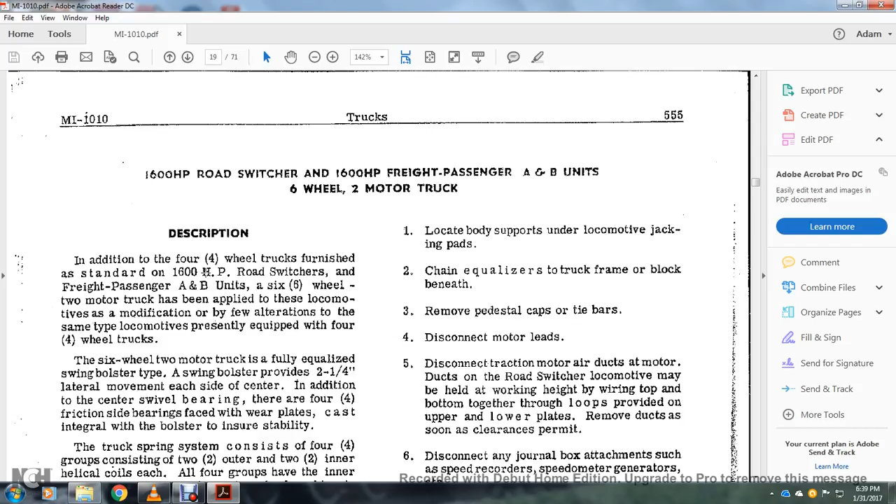Six-wheel, two-motor truck. The description: in addition to the four-wheel trucks furnished with the standard 1600 horsepower road switcher and the freight passenger A and B units, the six-wheel, two-motor truck has been applied with these locomotives. Modification and alteration for the same truck type locomotives presently equipped with the four-wheel trucks.

The six-wheel, two-motor truck is fully equalized with the swing bolster. The swing bolster is provided with 2 1/4 inch lateral movement to each side of the center. In addition to the center swivel bearing, there are four friction side bearings faced with wear plates cast integral within the bolster for stability.

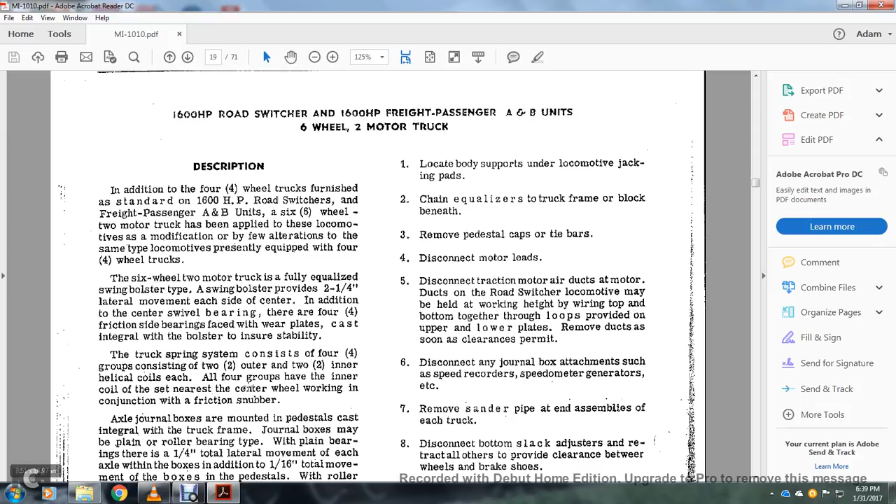The truck spring system consists of four groups, each consisting of two outer and two inner helical coils. All four groups have the inner coil near the center of the wheel working in conjunction with the friction snubber.

All axle journal boxes are mounted in pedestals cast integral with the truck frame. Journal boxes may be of the roller bearing type or the plain bearing type. There is a 1/4 inch total lateral movement on each axle with the plain bearing box, with 1/16 inch total movement of the boxes in the pedestal. With the roller bearing, the Timken or the SKF, the total lateral per axle is 1/4 inch, obtained with the movement of the boxes in the pedestal.

The lateral thrust in the plain bearing boxes is taken directly through the axle and stopped in each of the journal boxes. But with the Timken or SKF equipment, the thrust is taken directly from the bearings. No end thrust bearing is required.

The brakes are single shoe, one shoe per wheel. The power cylinder brackets and hanger brackets are also cast iron, integral with the truck frame. A manually operated slack adjuster is provided in order to compensate for brake shoe wear. Provisions are made for application of the hand brake chain.

Remove the axle, wheel and box assembly with the motors. To remove the axle, wheel and box assembly from the truck under the locomotive, a drop table is necessary. Assume that this equipment is a single table type large enough to handle the complete truck. The use of the table requires the locomotive to be supported at the jacking pads. When the table is lowered with the removal of the single axle, wheel and box assembly, the truck remains suspended on the safety hooks, and the procedure will be as follows.

One, locate the body support under the locomotive jack pads. Chain the equalizer to truck frame or block beneath. Remove the pedestal cap and tie bars. Disconnect the motor leads. Disconnect the traction motor air duct at the motor duct. Remove the ducts as soon as clearance is permitted.

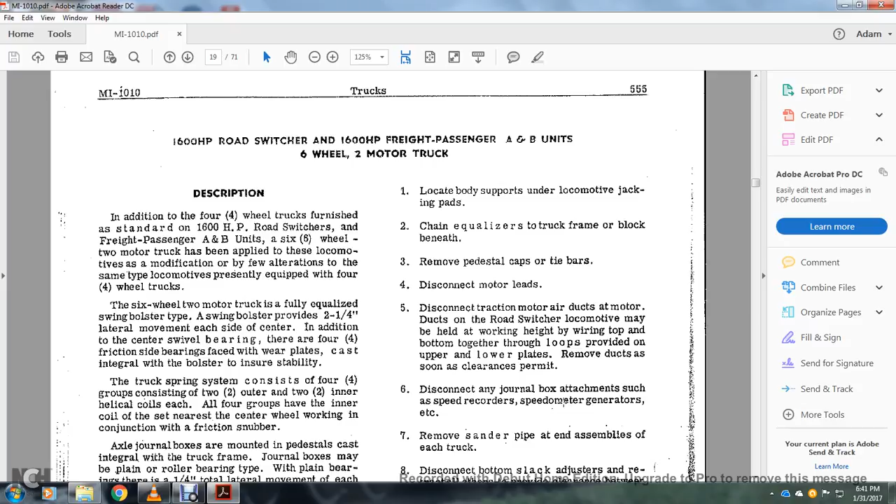Disconnect the journal box attachments such as the speed recorder, the speedometer generators, etc. Remove the sander pipe at each end of the assembly of each truck. Disconnect the bottom slack adjuster. Retract the brake shoes to provide clearance between the wheels and brake shoes, jack the motor nose, and remove the suspension assembly. See item 4 for the disassembly of the trucks.

Lower the motor until the motor safety lugs rest on the truck frame suspension brackets. Allow the drop table to settle slowly, keeping the motor nose on the jack pad so that the motor safety lugs will pass the truck frame lugs. Caution: exercise care with the motor air duct assembly so that it is not damaged. Continue to lower the assembly until it is free of the truck.

Reinstall the axle, wheel and box assembly. This operation should be performed in reverse sequence of the removal, with the axle assembly resting on the drop table. Correctly position the motor with the nose tilted so that the safety lugs will pass through the frame lugs. Raise the assembly until the safety lugs can again rest on the top of the frame lugs.

2. Bolt the air duct boot on the motor. Installation will be easier on the road switcher locomotive, if the boot is compressed and retained with the wires through the loops provided. Continue to raise the assembly to the normal position and in the pedestal and apply the caps. Reapply the motor nose suspension spring assembly.

See item 7 for reassembly of the truck. Reconnect the bottom slack adjusters. Reconnect the motor leads. Reconnect the journal box attachments. Check the brake adjustment. Readjust the sander pipe position. Check the lubrication packing assembly of the plain bearing boxes.

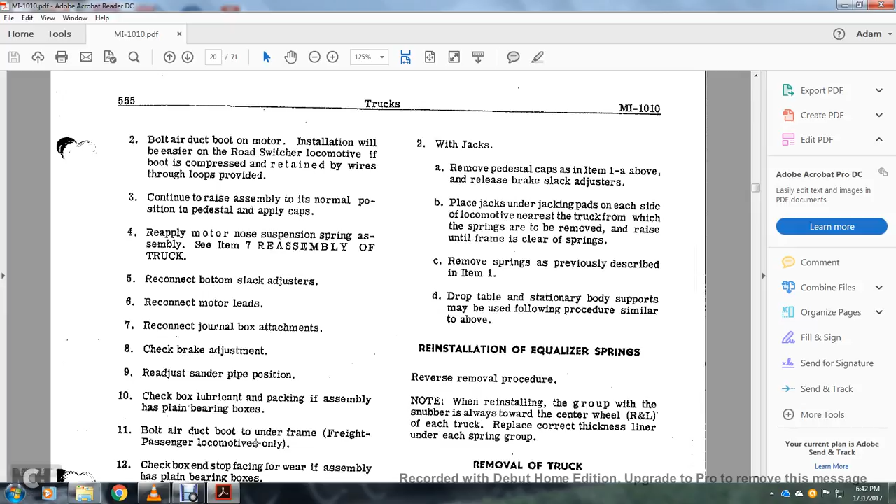Bolt the air duct to the underframe, with the freight passenger locomotives only. Check the box end stop facing for wear if assembly of the plain bearing boxes.

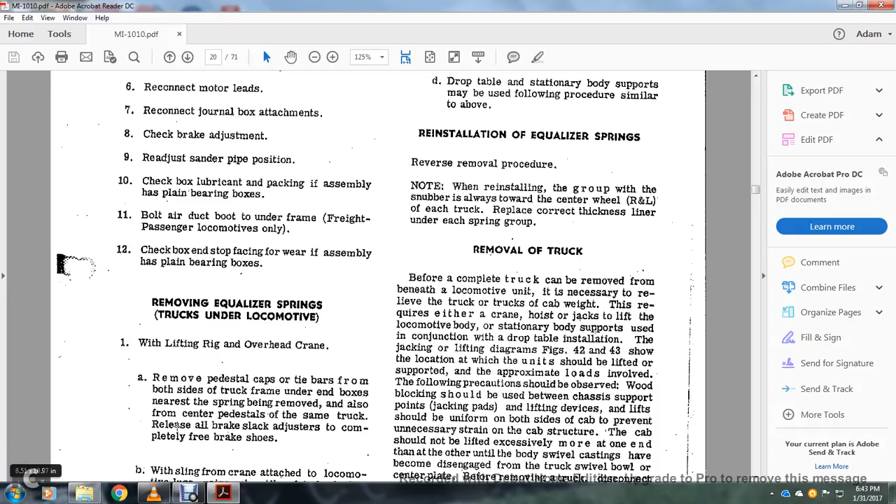Removing the equalizer spring from the trucks under the locomotive. With the lifting rig and overhead crane. Remove the pedestal tie bars from both sides of the truck frame under the end of the boxes near the spring being removed. Also from the center of the pedestal, same truck. Release all the brake slack adjusters to completely free the brake shoes.

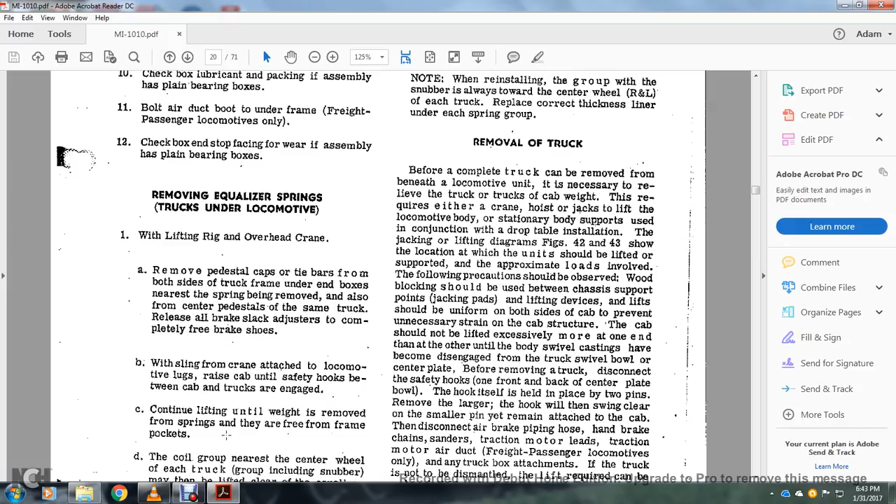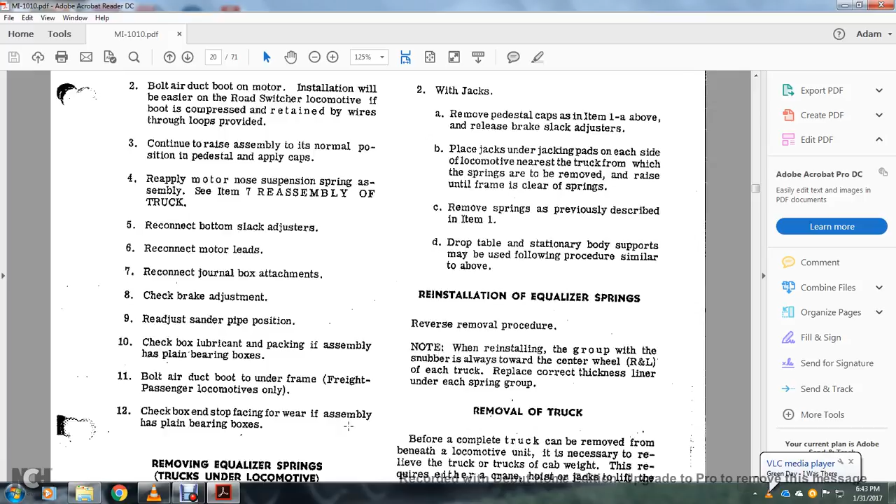The coil group nearest to the end of the wheels may then be removed. 2. With jacks, remove the pedestal caps as with item 1 above, to release the brake slack adjustment. Place the jacks on the jacking pads on each side of the locomotive near the truck with which the springs are to be removed. Raise until the frame is clear of the springs. Remove the springs previously described in item 1. Drop the table stationary body support. The following procedure, similar to above, may be used.

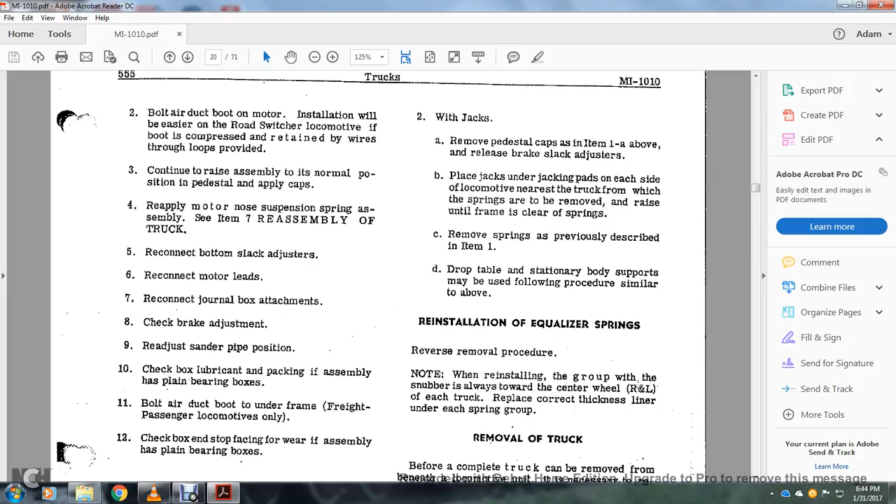Reinstallation of equalizer springs. Reverse the removal procedure. Note when reinstalling, the group with the snubber is always toward the center wheel, on the right and the left of each truck. Replace the correct thickness of liner under each of the springs removed. Alright, removal of the truck.

Before the complete truck can be removed from beneath the locomotive, it is necessary to relieve the truck or the trucks of the cab weight. This requires either a crane or a hoist or jacks to lift the locomotive body. The stationary body support is used in conjunction with the drop table installation. The jacking lifting diagrams, figures 42 and 43, show the locations at which the unit should be lifted and supported, with the approximate loads involved. The following precautions should be observed.

Wood blocking should be placed between the chassis, supported at the points of the jacking pad. The lifting device should lift uniformly on both sides of the cab to prevent unnecessary strain on the cab structure. The cab should not be lifted excessively more at one end than the other until the body swivel castings have become disengaged from the truck swivel bowl or center plate.

By a drop table, which requires the use of the stationary body supports lifting and the rig with an overhead crane. By jacking, lifting the cab a sufficient amount, disengaging the swivel castings and providing clearance above the truck so that they may be moved laterally beneath the locomotive, using the turntable, the transfer table, and using the jacks to remove the front truck on the freight passenger locomotive.

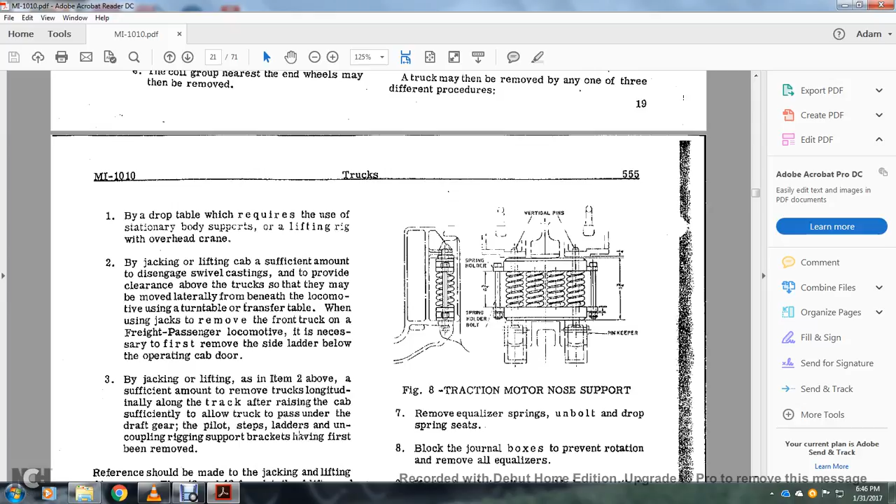It is necessary to first remove the side ladder below the operating cab door. By jacking and lifting item 2 above, sufficient to move the trucks longitudinally along the track after raising the cab sufficiently to allow the trucks to pass under the draft gear and pilot steps, ladders, and uncoupling rigging support brackets, having first been removed. References should be made to the jacking and lifting diagrams in figures 42 and 43 for the details and liftings and loads involved. Disassembly of the truck.

Remove all the pedestal tie bars. Remove the bottom slack adjusters. Retract all the other brakes so that the brake shoes are clear of the wheels. Remove the traction air duct from the top of the motors. Remove all the motor's nose suspension springs as follows.

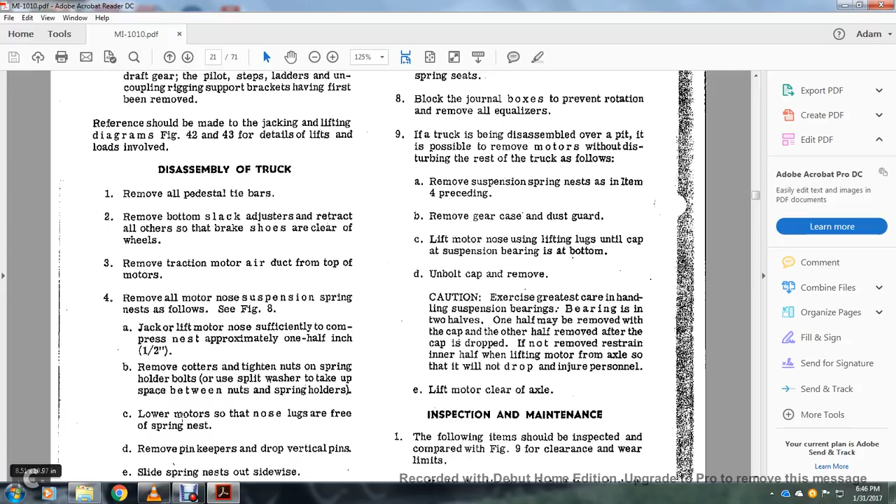Jack or lift the motor nose sufficiently to compress the spring approximately 1/2 inch. Remove the cotter. Tighten nuts on the spring holder bolts. Use the split washer to hold the spaces between the nuts and spring holders. Lower the motor so that the nose lugs are free of the spring nest. Remove the pin keeper to drop the vertical pins. Slide the spring nest out sideways. Again, raise the motor nose to provide clearance preparatory to

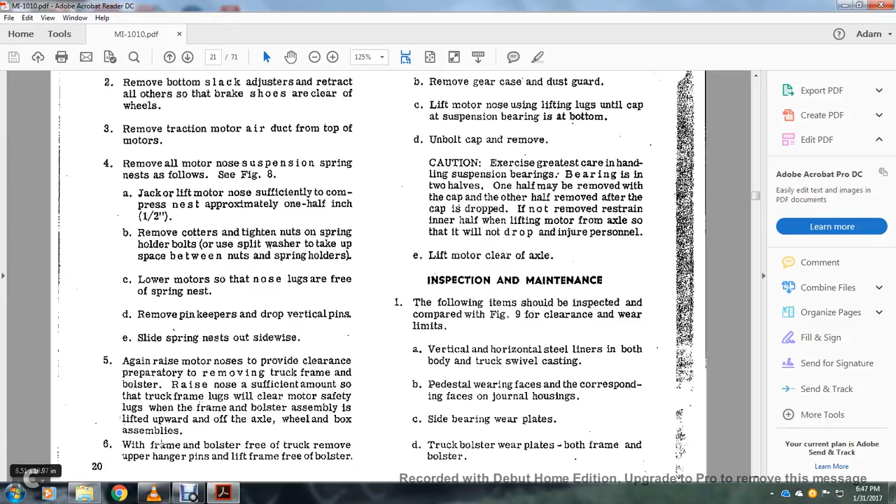removing the truck frame and the bolster. Raise the nose a sufficient amount so that the truck frame lugs will clear the motor. Safety lugs will clear and the frame and the bolster assembly are lifted upward off the axle wheel box assembly. With the frame and the bolster free of the truck, remove the upper hanger pins, lifting free of the bolster. Remove the equalizer springs, unbolt and drop the spring seat, block the journal box to prevent the rotation, and remove the equalizer.

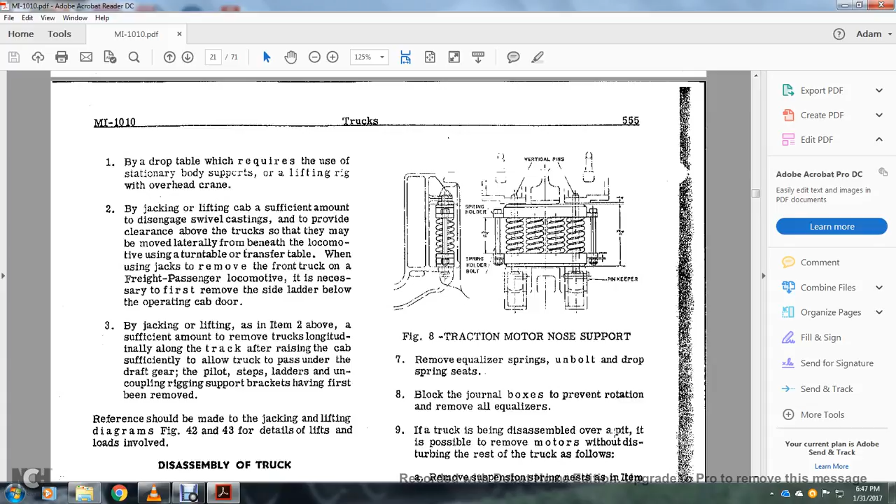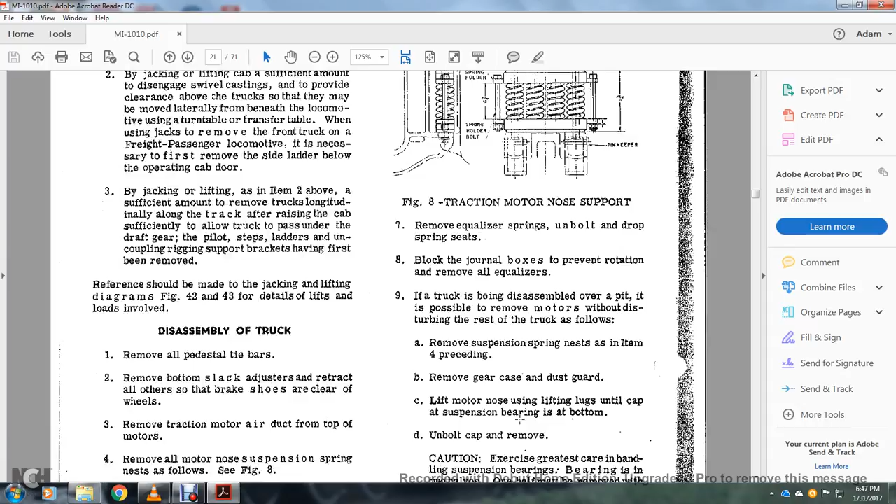If the trucks are being disassembled over a pit, it's possible to remove the motors without disturbing the rest of the trucks as follows. A. Remove the suspension spring nest. B. Remove the gear case and the dust guard seat, lifting the motor nose, the lifting lugs, until the cap of the suspension bearing is at the bottom. Unbolt the cap. Exercise great care in handling the suspension bearing, which is in 2 halves.

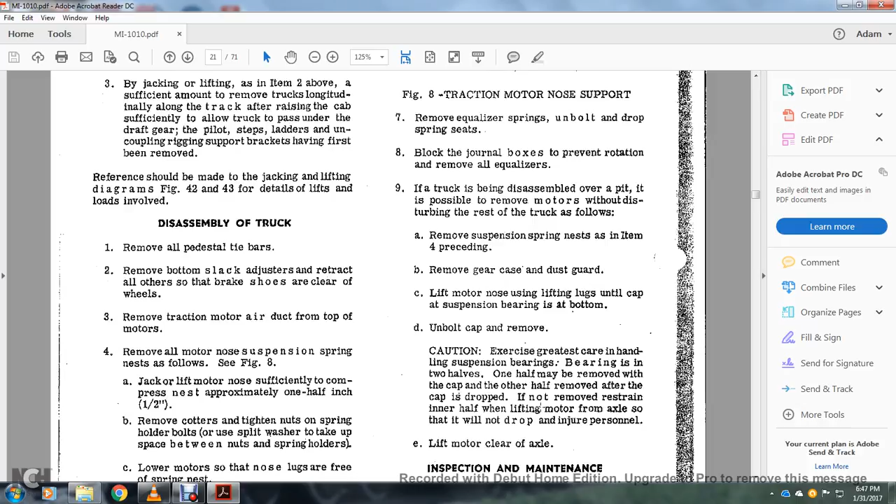One of the halves may be removed with the cap, and the other half is removed after the cap is dropped. If it's not removed, restrain the inner half when lifting the motor from the axle so that it will not drop and injure personnel. Lifting motor clear of the axle. Figure 8 shows the traction motor nose support with the spring holder bolt, the spring holder, and the pin keeper, the vertical pins.

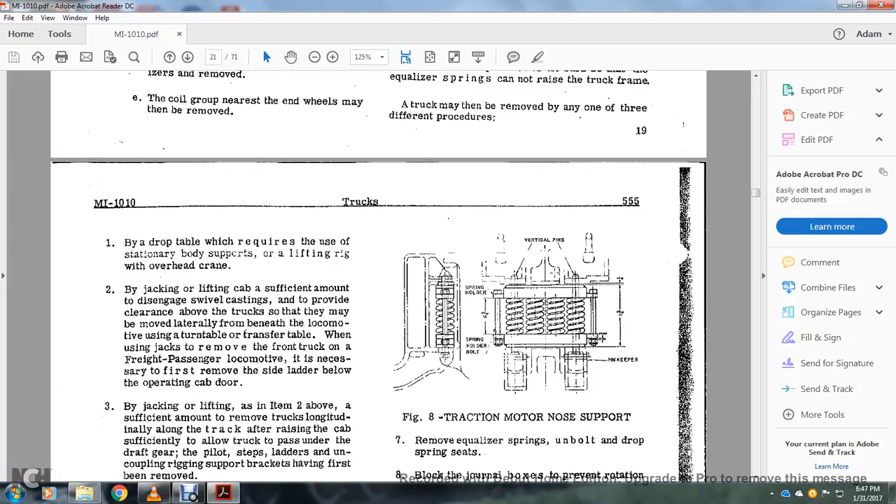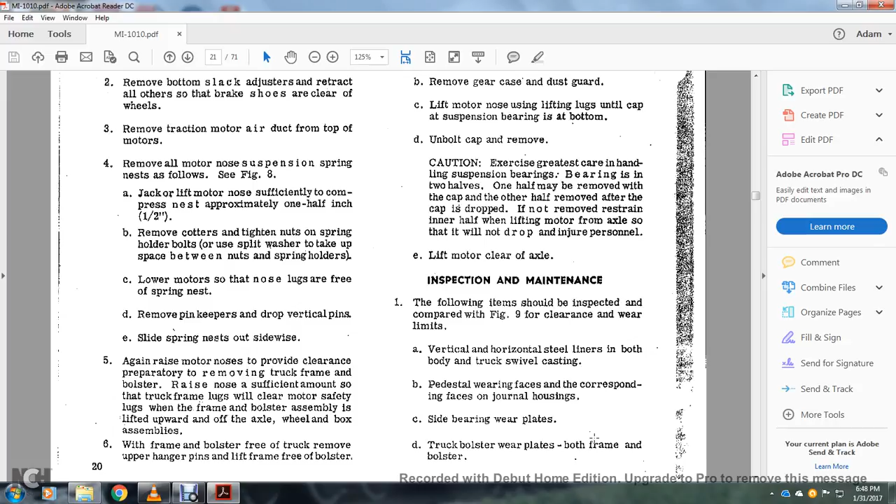All right, inspection and maintenance. The following items should be inspected and compared with figure 9 with the clearance and wear limits: vertical and horizontal steel liners of both body and truck swivel casting, pedestal wearing face and the corresponding face on, the journal housing side wearing plates, the truck bolster wear plates of the bolster frame and the bolster. Swing link pins and bushings, spring hangers, restraint brackets, wear bolts, wear plates, and such as foundation brake hangers, equalizing pin and bushing seat of the foundation brakes.

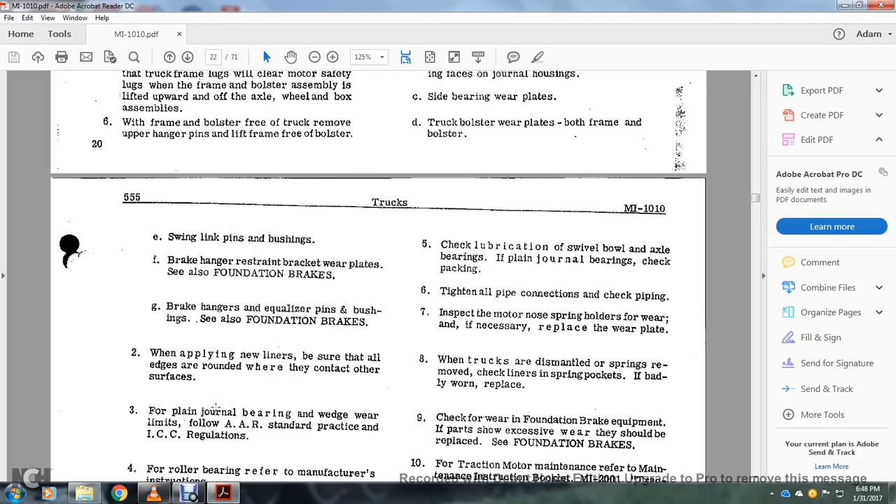When applying new liners, be assured that all the edges around that they contact the surface of the plain journal bearing wedge wear within limits that follow the AAR and standard practice of the ICC regulation. For the roller bearing, refer to the manufacturer's instruction. Check lubrication of swivel bowl, axle bearing, plain journal bearing.

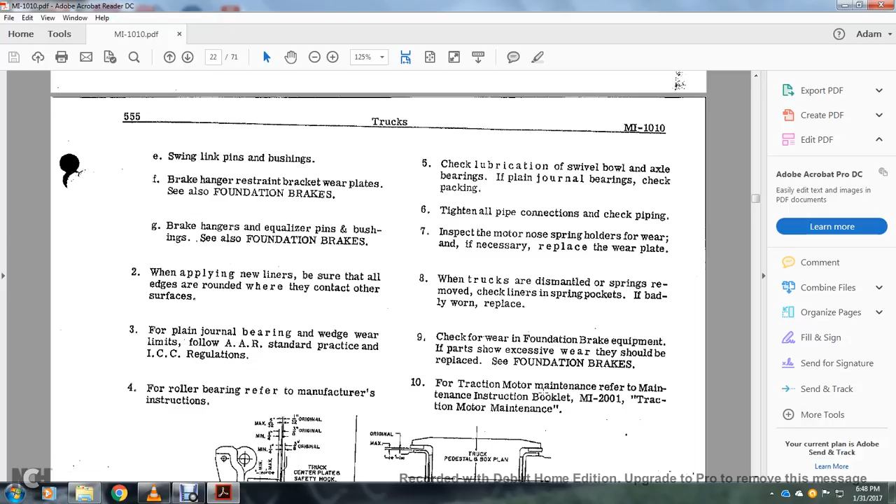Check and tighten all the pipe connections. Check piping, inspect motor nose and spring holders for wear. If necessary, replace the wear plates of the trucks and dismantle the spring, remove and check liners of the spring pockets, and if badly worn, replace. Check for the wear of the foundation brake equipment and parts, and excessive wear should be replaced, and see the foundation for the traction motor maintenance. Refer to the maintenance instruction booklet, MI 2001, traction motor instruction. All right, this shows your truck pedestal box plan.

The truck center plate with the safety hooks, your truck bolster, and your truck pedestal box, along with your swing hanger pin and bushing, truck side bearing, and truck brake hanger restraining pad.

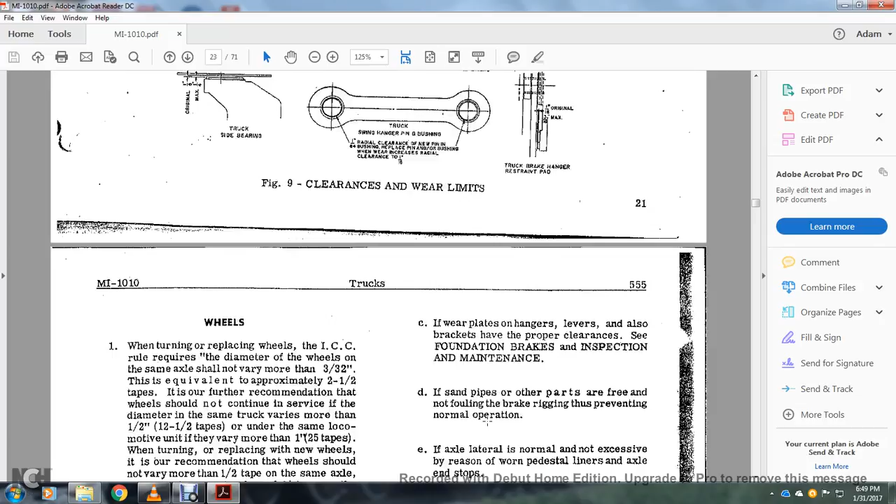All right, wheels. When turning or replacing wheels, the Interstate Commerce Commission requires that the diameter of the wheels on the same axle shall not vary more than 3/32 of an inch, equivalent to approximately 2 and 1/2 tapes. Another recommendation is that wheels on the same truck should not vary more than 1/2 inch, or 12 and 1/2 tapes. Under the same locomotive unit, wheels that vary more than 1 inch, or 25 tapes, should be replaced with new wheels.

The recommendation for the wheels is that they should not vary more than 1/2 the tape on the same axle, 2 tapes on the same truck, or 14 tapes on the same locomotive. Wheels should be checked periodically for wear according to the Interstate Commerce Commission regulations.

If excessive wear is found, check to determine if the brake shoes are free and not binding with the flange of the wheel tread, if the brake hanger levers are hanging the shoe without causing misalignment of the shoe, and if the wear of the plates of the hanger lever is bracketed with the proper clearance. Inspect the foundation brake maintenance, and whether the sandpipes or other parts are free and non-fouling of the brake equipment rigging, preventing normal operation. Check whether the axle lateral is normal and not excessive because of the pedestal liners, axle end stops, or excessive variation of wheel diameter, see item 1 above.

All right, when applying new shoes, they must hang true in the heads, the nuts of the brake head pins should be adjusted so that vibrational shock will not cause the shoe to drag the wheel, but still permit the face of the shoe to conform to the wheel as the wear progresses.

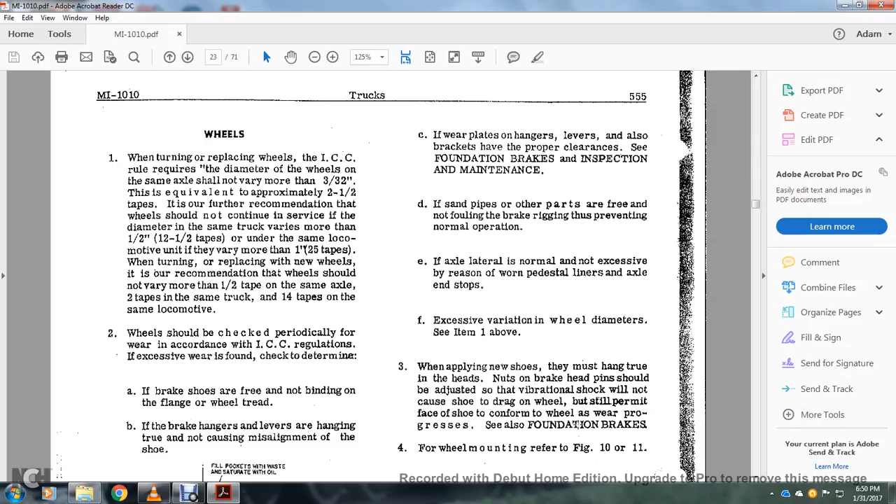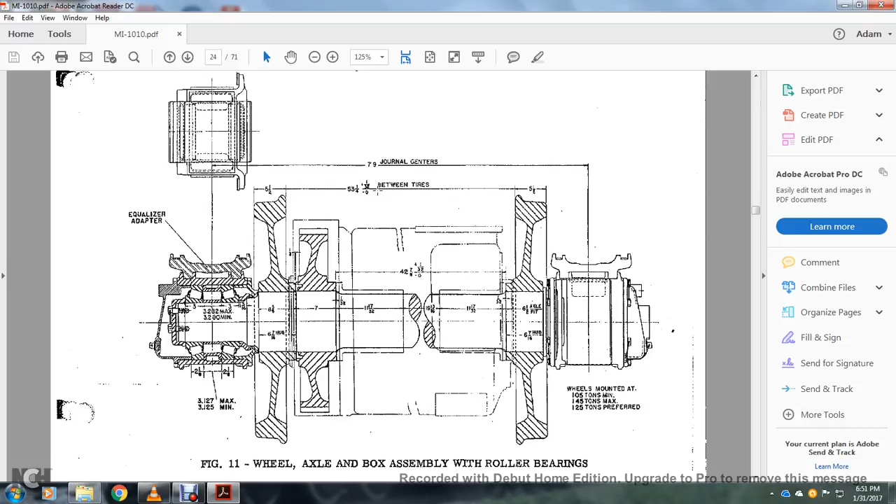All right, axle gear. The mounting of the axle gear is based on interference fit, regardless of the tonnage pressure recommended with the interference fits. The bore of the axle gear is 9.991 of an inch plus .001 of an inch or minus .000 of an inch diameter. Axle 10 inches, plus or minus .001 of an inch. For complete axle gear instruction, see maintenance instruction booklet MI 2001, truck maintenance, traction motor maintenance.

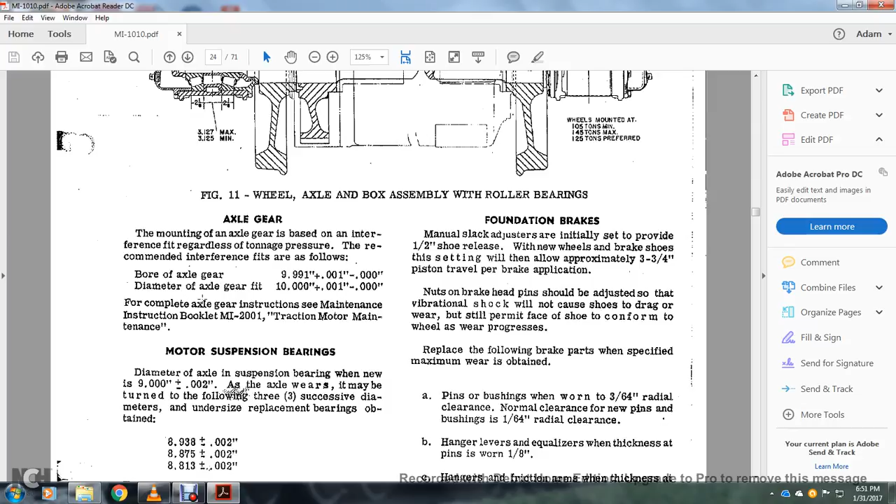The motor suspension bearings: the diameter of the axle at the suspension bearings when new is 9 inches, plus or minus .002 inch. As the axle wears, it may be turned to the following three successive diameters. Undersize replacement bearings are obtained with 8.938 plus or minus .002 inch, 8.875, .002 of an inch, and 8.813, .002 inch. For the complete axle bearing instruction, see maintenance instruction booklet MI 2001 traction motor maintenance. See the parts bulletin DRP 1317 undersized bearings.

All right, your foundation brakes. The manual slack adjuster is initially set to provide 1/2 inch shoe release with new wheels. The brake shoe setting will allow approximately 3 3/4 of an inch piston travel per brake application. Nuts of the brake head pin should be adjusted so that vibrational shocks will not cause the shoe to drag with the wear, but shall permit the face of the shoe to conform to the wheel as the wear progresses. Replace the foundation brake parts following wear. Specify the maximum wear is obtained.

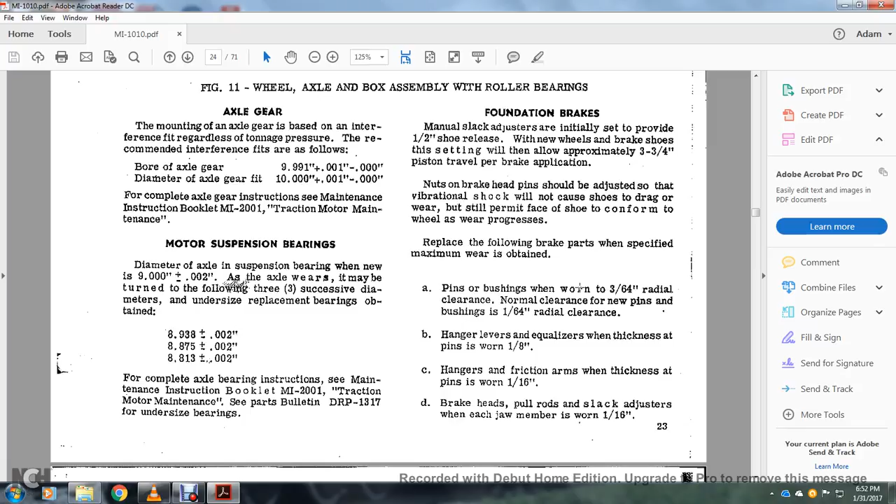Pins and bushings will be worn with a 3/64 inch radial clearance with normal clearance. The new pins and bushings have 1/64 radial clearance, Hanger levers and equalizers when thickness of the pins 1/8 of an inch, Hangers and friction arms of the thickness at the pins, 1/16 of an inch. Brake heads, pull rods, and slack adjusters, when each of the jaw members is worn 1/16 of an inch. All right, hangers, equalizer, fulcrum brackets, and pins supporting are worn 1/16th of an inch. Clevises when pin holes.

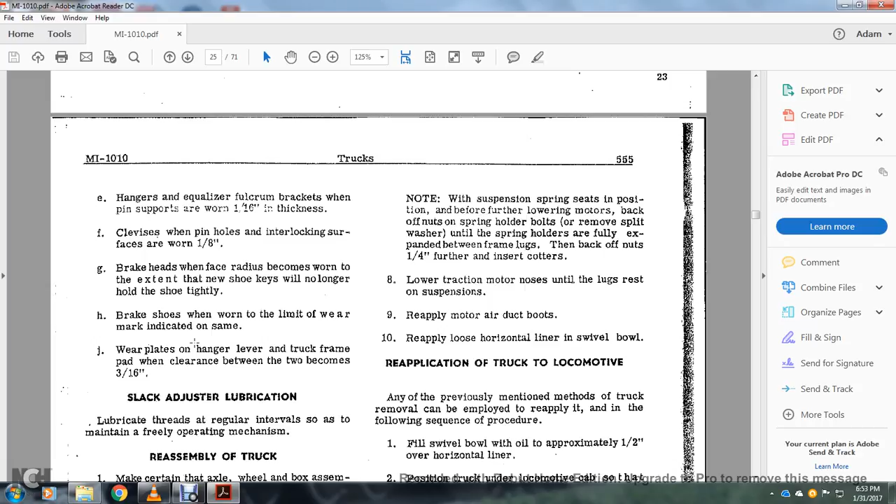Interlocking surface is worn 1/8 of an inch. Brake head: when facing the radius becomes worn to the extent that the new shoe keys will no longer hold the shoe tightly. Brake shoes will be worn limited to the wear mark of identification indicated on the same, wear plates on the hanger lever and truck frames, and where clearance between them becomes 3/16 of an inch.

Slack adjuster lubrication. Lubricate the threads at regular intervals so that all mechanisms maintain free operation. Reassembly of the truck. Make certain that the axle, wheel, and box assemblies and axles have splined holes in the ends for the use of the drive. The journal box mounted with the equipment such as the speed recorder, speedometer, transition generators, etc., are positioned the same way that they were when the truck was removed from the locomotive.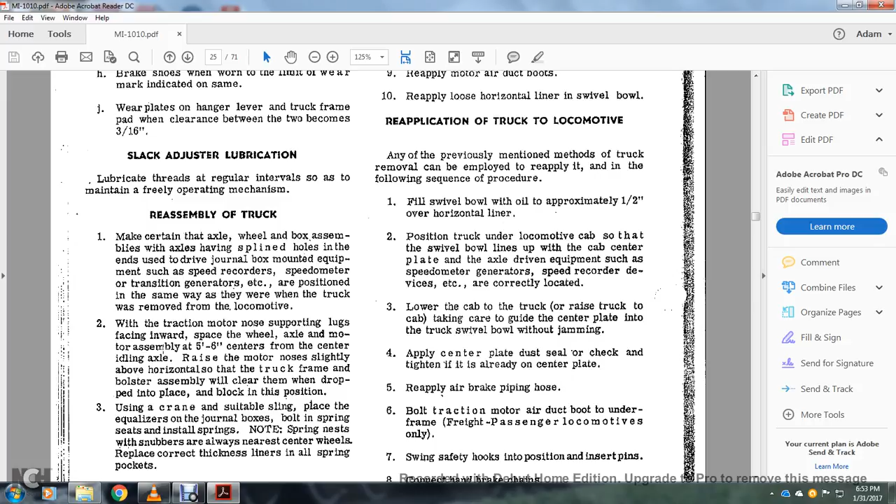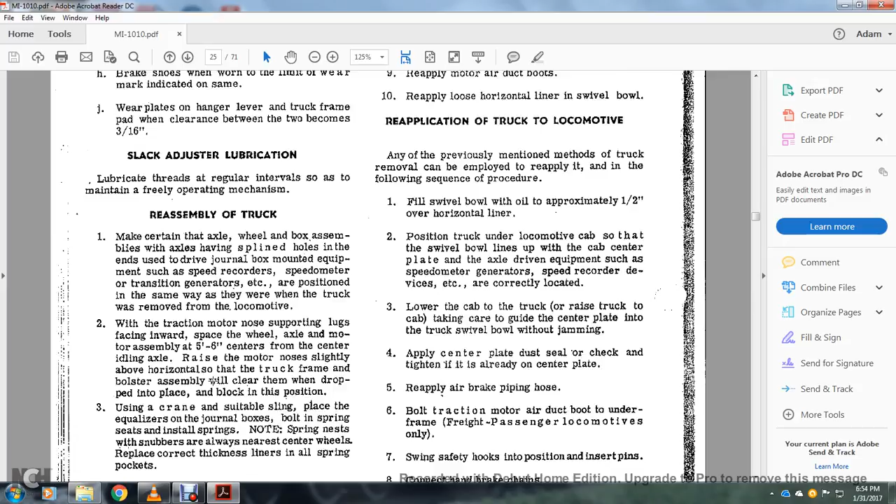2. When the traction motor nose supporting lugs are facing inward, space the wheels, axle, and motor assembly 5 foot 6 inches center to center, raising the motor nose slightly above the horizontal so that the truck frame and the bolster assembly will clear when dropped into place, block in this position. 3. Using a crane and suitable sling, place the equalizer on the journal box, bolt in the spring seat.

Then install the springs. Note the spring nests with snubbers are always nearest to the center wheels. Replace the correct thickness liners in all spring pockets with all the foundation brakes of the equipment except for the bottom slack adjusters assembled to the truck frame with the bolster installed, lower the frame into position between the equalizer and finally onto the coil springs.

Attach the bottom slack adjusters, attach the pedestal tie bars. Lower traction motor nose suspension spring nests may be slid in between the lugs and motor frame. Push the vertical pins in the spring nest at the bottom and apply the pin keeper. If the truck is not assembled over a pit. It will be necessary to raise the truck in order to insert the suspension pins.

Note: with the suspension spring seats in position and before the further lowering of the motors, back off the nuts and spring holder bolts or remove the split washer until the spring holders are fully expanded between the frame lugs. Then back off the nuts 1/4 of an inch further and insert the cotter. Lower the traction motor nose until the lugs rest in the suspension. Reapply the motor air duct boots. Reapply the loose horizontal liner in the swivel bowl.

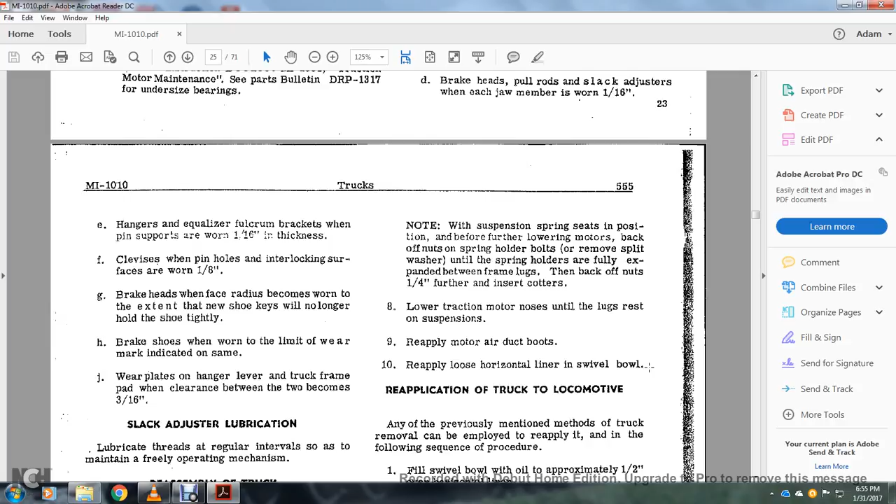Reapplication of the truck to the locomotive. Any of the previously mentioned methods of truck removal can be employed to reapply in the following sequence. Fill the swivel bowl with oil to approximately 1/2 inch over the horizontal liner. Position the truck under the locomotive cab so that the swivel bowl lines up with the cab center plate and the axle driven equipment such as the speedometer,

generator, speed recorder devices, etc., are correctly located. Lower the cab onto the truck or raise the truck to the cab, taking care to guide the center plate into the truck swivel bowl without jamming. Apply the center plate dust seal or check and tighten it if it is already on the center plate. Reapply the air brake piping hose, bolt traction motor air duct boot under the frame, freight passenger locomotive.

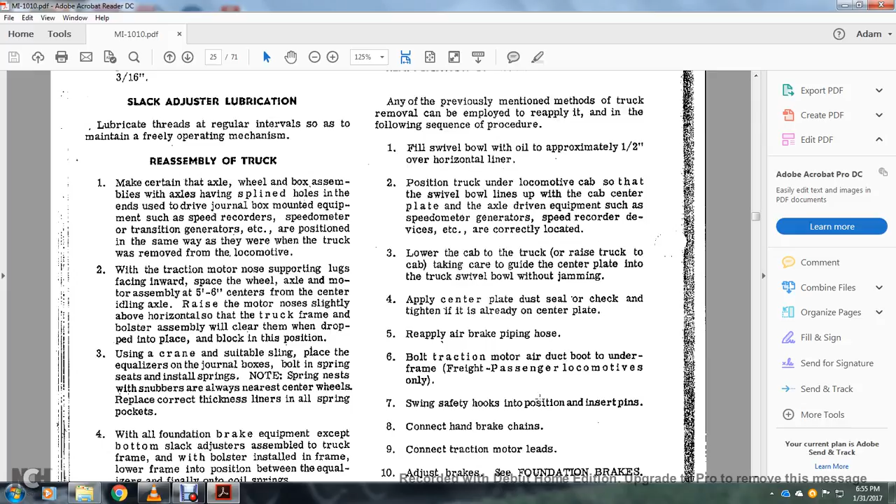Swing safety hooks into position. Insert pin, connect the handbrake chains, connect the traction motor leads, adjust the brakes, see the foundation brakes, connect any of the journal box attachments such as the speedometer, generator, speed recorder drives, etc.

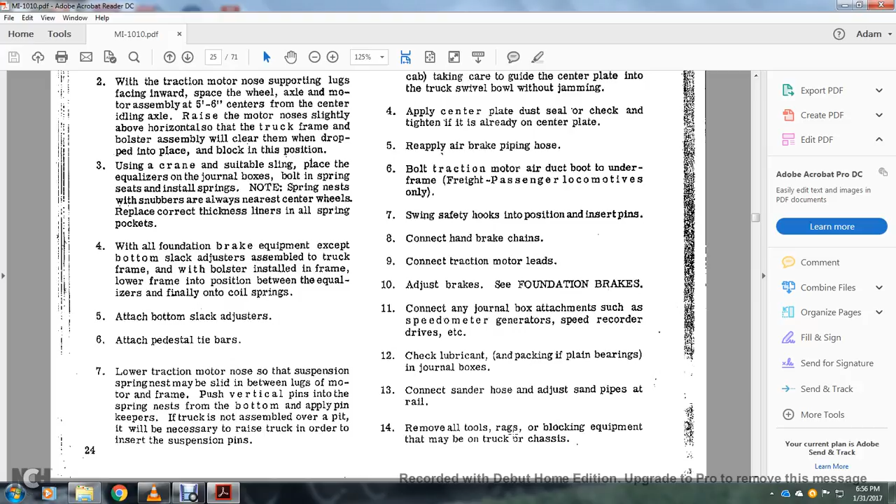Check lubricant, and packing if plain bearings, in the journal boxes. Connect all the sander hoses and adjust the sand pipes at the rail. Remove all the tools and rags and blocking equipment that may be on the truck or the chassis.

Adjustment of the center plate height. When it becomes necessary to raise the center plate height to compensate for worn wheels, it may be done as follows. A 1/2 inch thick liner may be applied in each of the helical spring pockets at the bottom and the top. The 1/2 inch liner may be applied with the truck swivel bowl under the loose horizontal wear plate, which, when this is done, the side bearings and safety hooks must be adjusted accordingly.

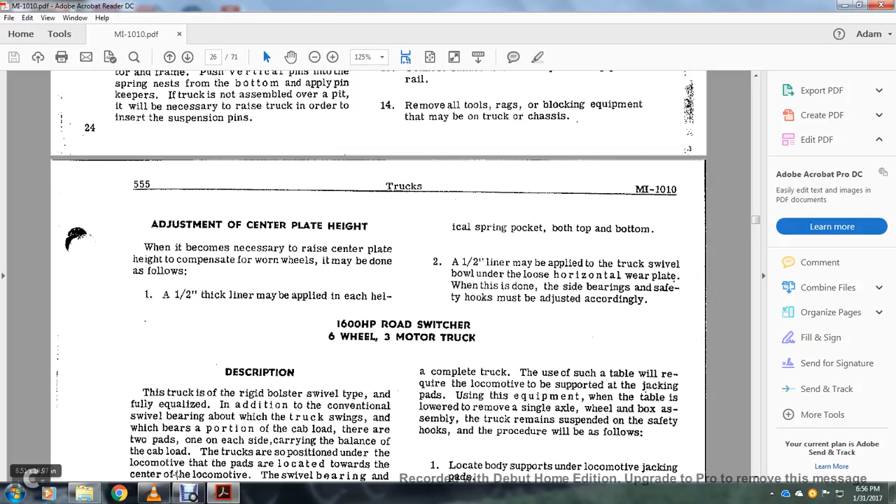1600 horsepower road switcher, 6-wheel, 3-motor truck. Testing.